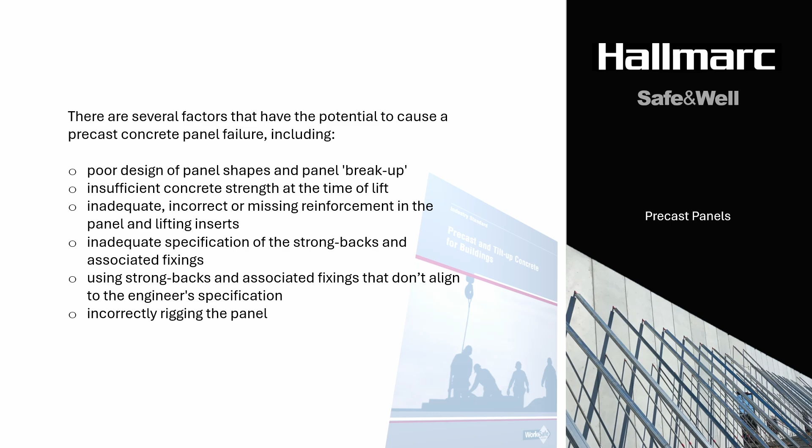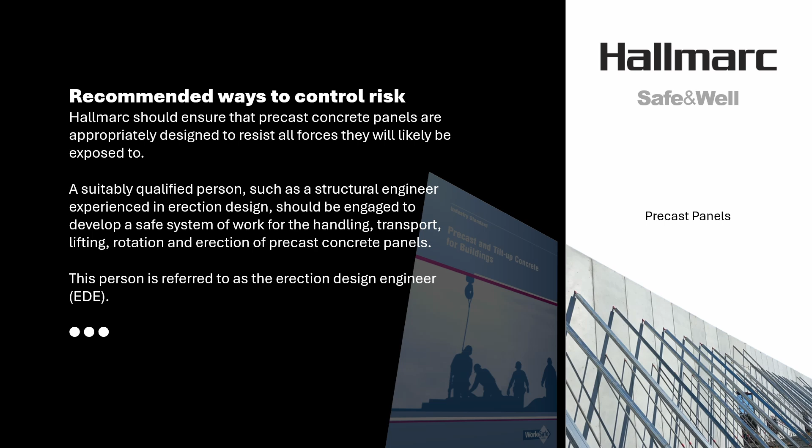Recommended ways to control risk. Hallmarc should ensure that all precast concrete panels are appropriately designed to resist all forces they will likely be exposed to. A suitably qualified person, such as a structural engineer experienced in erection design, should be engaged to develop a safe system of work for the handling, transport, lifting, rotation and erection of precast concrete panels. This person is referred to as the erection design engineer, or EDE.

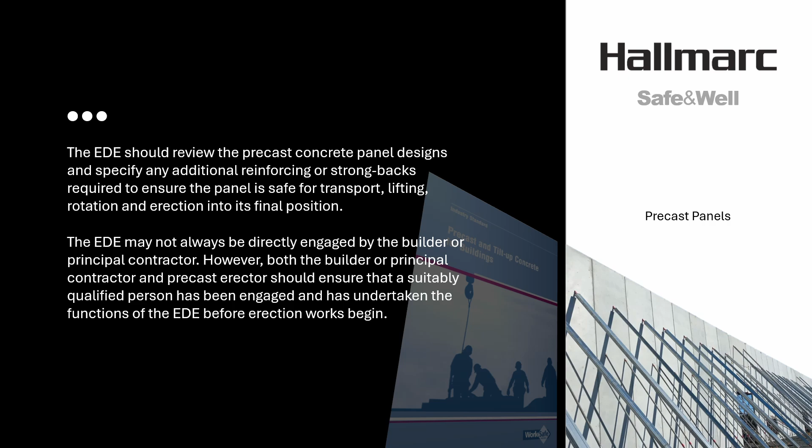The EDE should review the precast concrete panel designs and specify any additional reinforcing or strongbacks required to ensure the panel is safe for transport, lifting, rotation and erection into its final position. The EDE may not always be directly engaged by the builder or principal contractor. However, both the builder or principal contractor and precast erector should ensure that a suitably qualified person has been engaged and has undertaken the functions of the EDE before erection works begin.

The following critically important factors should be addressed to reduce the risk of a precast concrete panel failing during rotation. Please note that this is a non-exhaustive list. Prior to panel manufacture, the project structural engineers and builder should consult with the erection design engineer and precast panel manufacturer to ensure that the precast panel breakup design achieves panel shapes that are robust and can be handled safely, where possible without the need for strongbacks and additional reinforcement.

The EDE should carefully consider all forces that the panel will be exposed to during lifting, rotation and placement, and review the design of the panel to determine whether additional reinforcement or strongbacks are required to ensure that it can be handled safely, especially where the panel has cutouts or penetrations. And provide the precast manufacturer with marked-up structural or shop drawings that accurately and clearly show the necessary lifting and bracing insert locations and any additional reinforcement or strongbacks required.

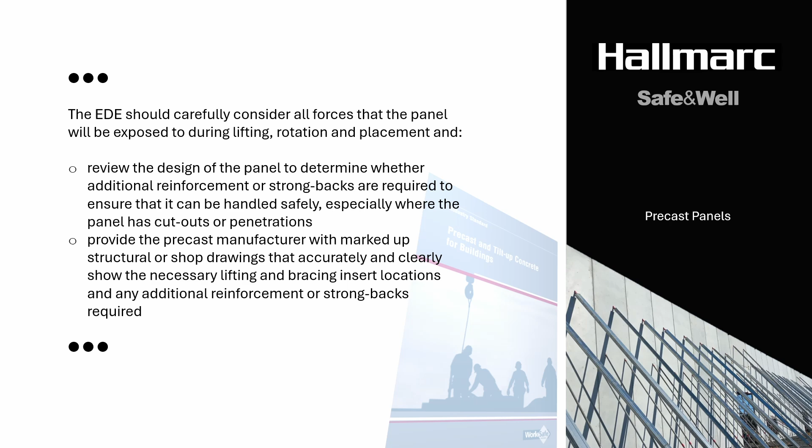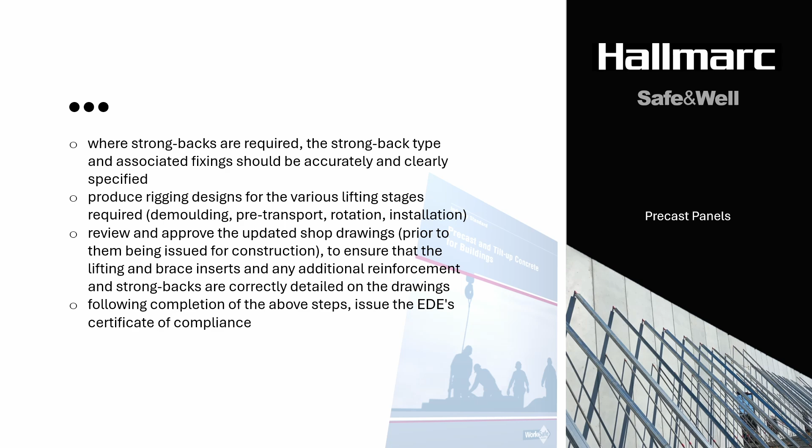Where strongbacks are required, the strongback type and associated fixings should be accurately and clearly specified. Produce rigging designs for the various lifting stages required, such as demolding, pre-transport, rotation, and installation. Review and approve the updated shop drawings prior to them being issued for construction to ensure that the lifting and brace inserts and any additional reinforcement and strongbacks are correctly detailed on the drawings. Following completion of the above steps, issue the EDE Certificate of Compliance.

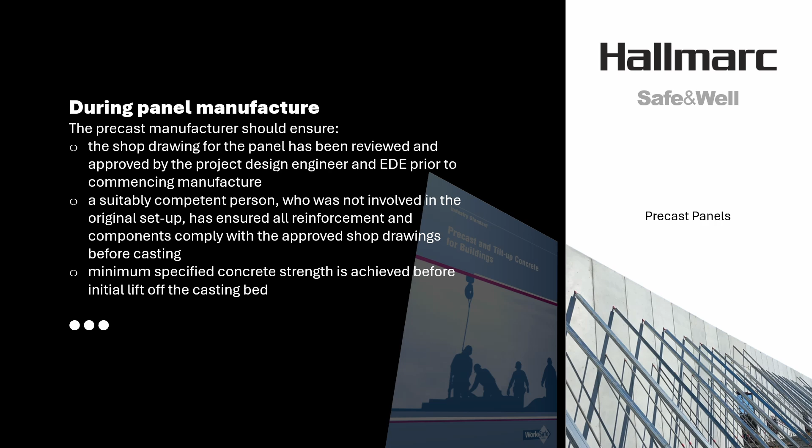During panel manufacture, the precast manufacturer should ensure the shop drawing for the panel has been reviewed and approved by the project design engineer and EDE prior to commencing manufacture. A suitably competent person, who was not involved in the original setup, has ensured all reinforcement and components comply with the approved shop drawings before casting, and that the minimum specified concrete strength is achieved before the initial lift off the casting bed. All strongbacks are installed as per the EDE specification prior to lifting or transport.

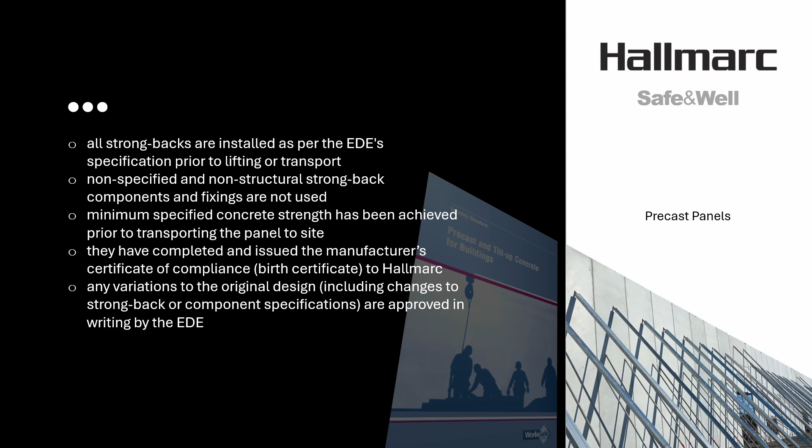Non-specified and non-structural strongback components and fixings are not used. Minimum specified concrete strength has been achieved prior to transporting the panel to site. They have completed and issued the manufacturer's certificate of compliance to Hallmarc. And any variations to the original design, including changes to strongback or component specifications, are approved in writing by the EDE.

Prior to lifting the panel on site. When the precast concrete panel arrives at site, but prior to lifting, an appropriately ticketed rigger should inspect the panel to ensure it aligns with the shop drawing, for example, dimensions, cast-in plates, inserts and ferrule locations all match the drawing, and that the panel and components are free from damage. Confirm the lifting inserts match the shop drawing specification and are free from damage. And confirm the concrete adjacent to the lifting inserts is in good condition and free from significant cracking, honeycombing or damage. If in doubt, seek advice from the EDE.

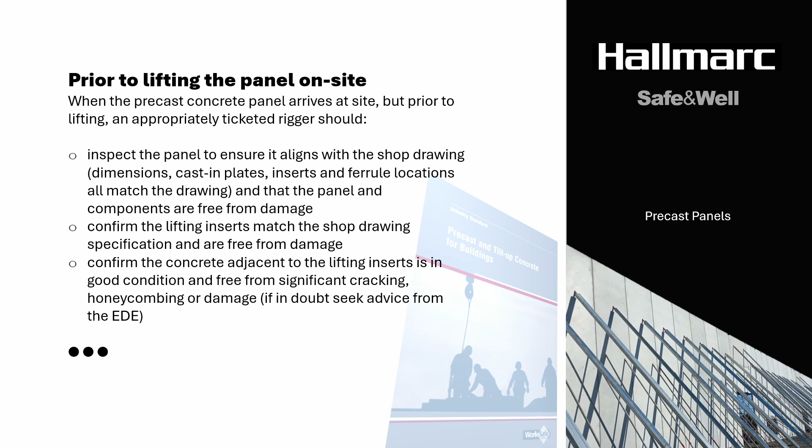Ensure strongbacks are all in place and as per the shop drawing specification. Look for type, size, location, orientation and fixings. Review the birth certificate for the panel to confirm the casting date. Confirm the lifting clutches are compatible with the lifting inserts, and inspect all rigging gear prior to use. Ensure the panel is rigged in accordance with the relevant rigging design, being sure to use the correct lifting inserts where there are multiple inserts present. And stop the lift and seek advice from the EDE if any of the above safety critical information is missing or if there are any issues identified during inspection of the panel.

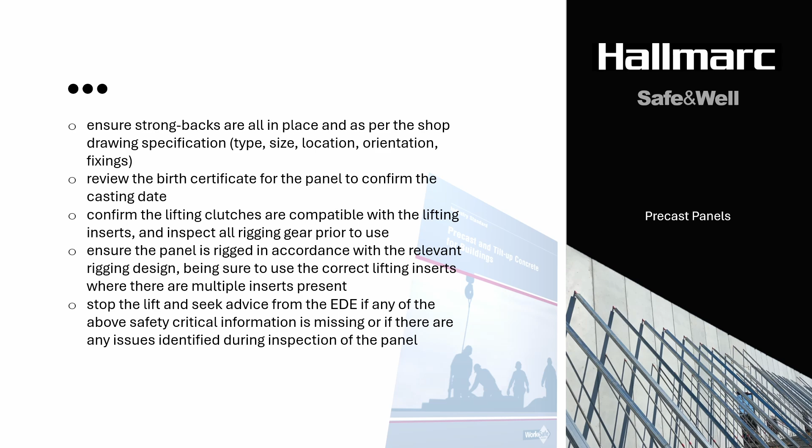Delivery. Look out for these potential issues. Defective trucks or A-frames, such as damage to the truck or trailer, and fall risks not being controlled. Inadequate load restraints on A-frames and panels, for example, panel lashing sequence, and over-center dogs or twitches being used.

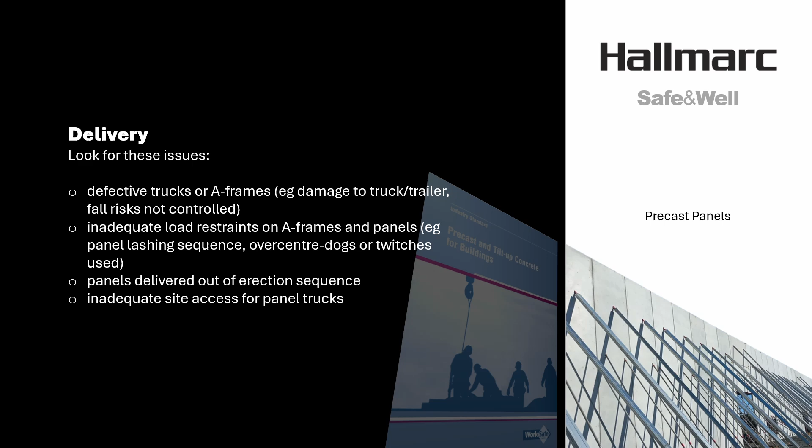Panels delivered out of erection sequence. And inadequate site access for panel trucks. Is craneage sufficient for the erection? Selection of cranes should be in accordance with Australian Standard 2550 and consider capacity required at working radius when lifting. Sufficient craneage to safely rotate panels.

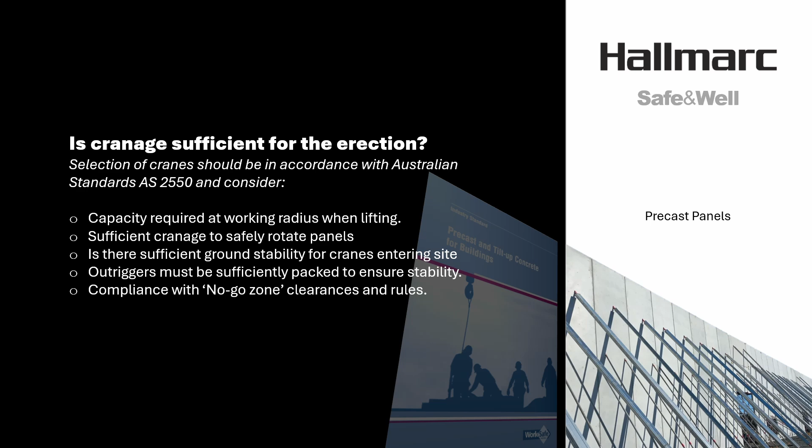Is there sufficient ground stability for cranes entering site? Are outriggers sufficiently packed to ensure stability and compliance with no-go zone clearances and rules? Panel erection. Has the necessary preparation been completed prior to erection? A risk assessment should deal with all aspects of preparation to ensure the access and erection area is safe.

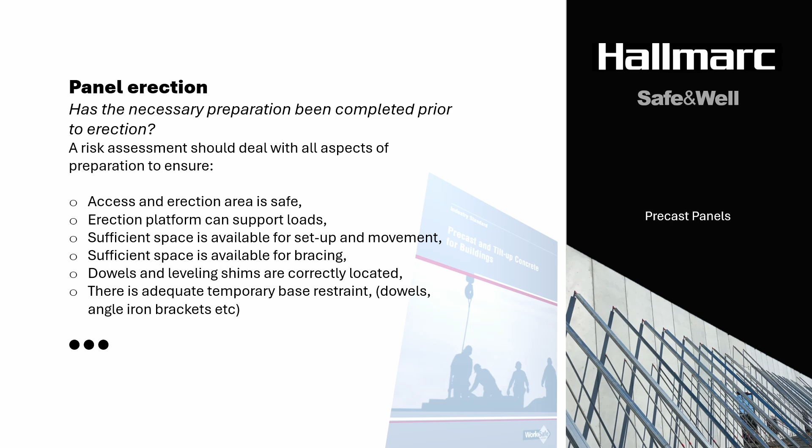The erection platform can support loads. Sufficient space is available for setup and movement. Sufficient space is available for bracing. Dowels and leveling shims are correctly located. There is adequate temporary base restraint, such as dowels or angle iron brackets. Panel and brace footing has attained specified strength.

Rigging equipment is in serviceable condition. Check for clutches proof tested every 6 months. Slings, chains and sheaves are free from damage and excessive wear. Lifting and spreader beams are marked with working load limits. Lifting inserts are in their correct location, as specified on shop drawings, and recesses cleaned. And only the minimum number of people are working in the erection area.

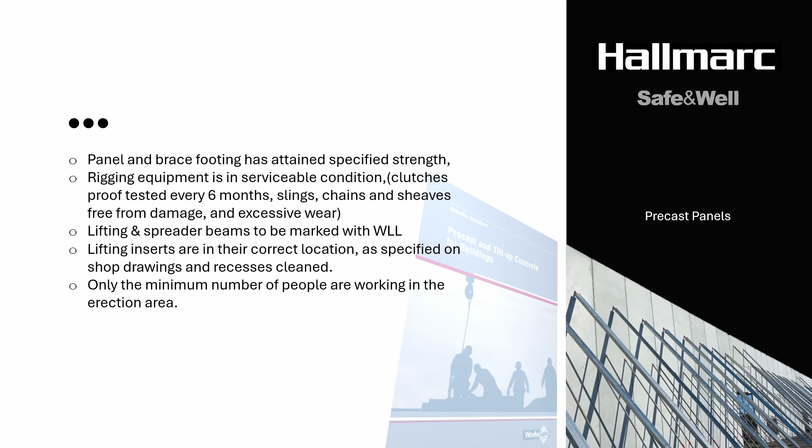Are the members of the erection crew properly trained and certified? The person responsible for direction and coordination must hold a certificate of competency in either intermediate rigging or advanced rigging classes. The person responsible for the coordination of the panel erection must also have received training based on the industry standard. The crane operator must hold a certificate of competency appropriate for the type and size of crane being used. The crew should include at least one additional certified rigger.

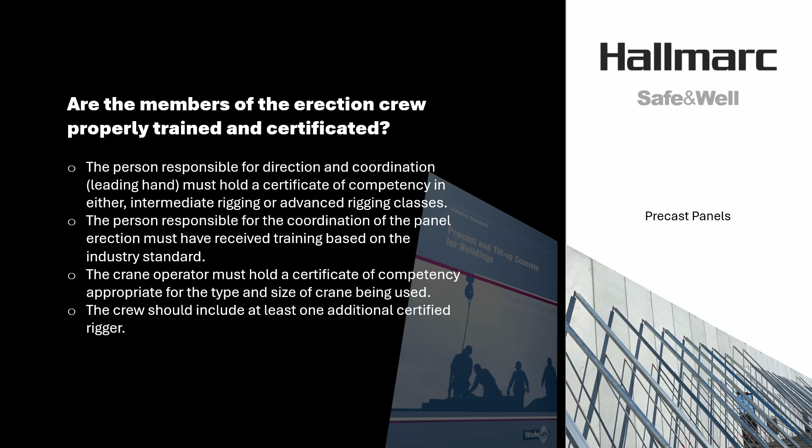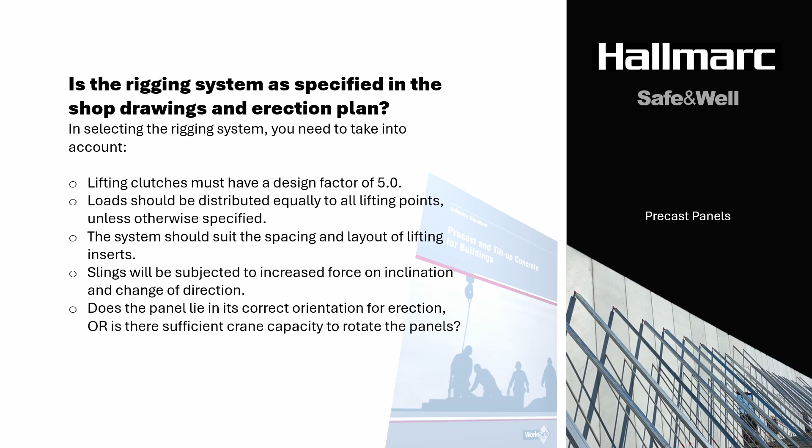Is the rigging system as specified in the shop drawings and erection plan? In selecting the rigging system, you need to take into account: lifting clutches must have a design factor of 5.0. Loads should be distributed equally to all lifting points, unless otherwise specified. The system should suit the spacing and layout of lifting inserts. Slings will be subjected to increased force on inclination and change of direction. And does the panel lie in its correct orientation for erection, or is there sufficient crane capacity to rotate the panels?

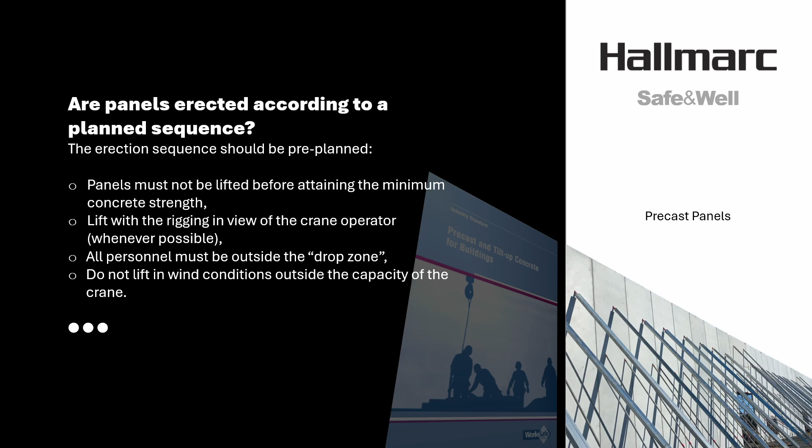Are panels erected according to a planned sequence? The erection sequence should be pre-planned. Panels must not be lifted before attaining the minimum concrete strength. Lift with the rigging in view of the crane operator, whenever possible. All personnel must be outside the drop zone. Do not lift in wind conditions outside the capacity of the crane.

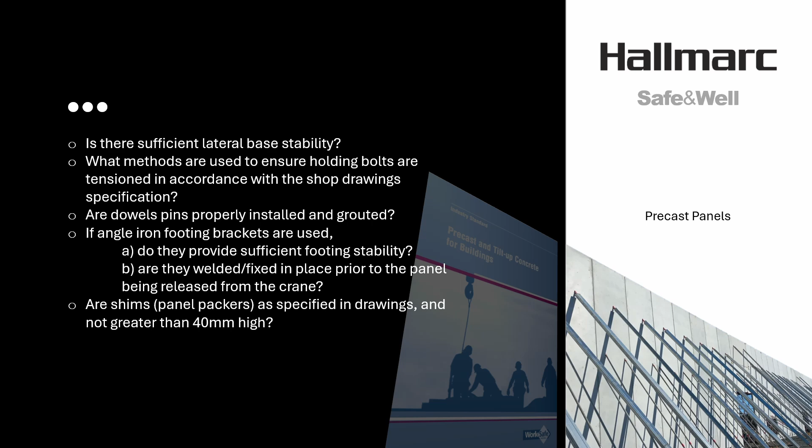Is there sufficient lateral base stability? What methods are used to ensure holding bolts are tensioned in accordance with the shop drawing specification? Are dowel pins properly installed and grouted? If angle iron footing brackets are used, then A, do they provide sufficient footing stability? And B, are they welded or fixed in place prior to the panel being released from the crane? Are shims specified in drawings, and not greater than 40 mm high?

Where temporary bracing is required, is it able to resist all loads? The panel must be held firmly and safely by the crane while all braces are attached. Braces must have identification plates and load capacity marked. Working load limit must be in accordance with Australian Standard 3850. A minimum of 2 braces must be used for each panel. Bracing anchor bolt size and length must be as specified on the shop drawings. And are knee bracings required?

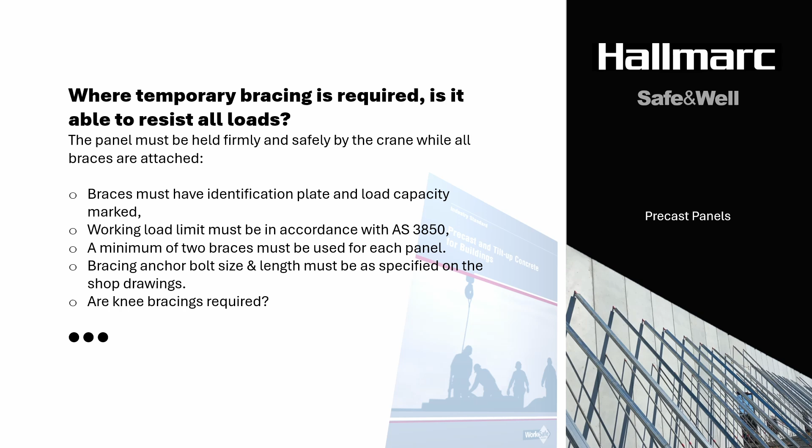Braces should, where possible, be located at 2/3 of the height of the panel. Temporary concrete pad footings for bracing must be designed to support brace footings. Footing design documentation must show concrete strength at installation, additional reinforcement and dimensions. If a screw-in steel footing plate system is used, soil testing results must be kept with shop drawings and erection plan.

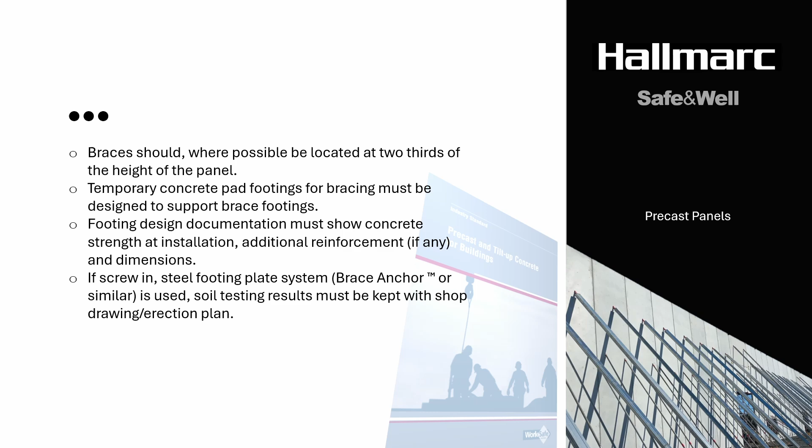Ongoing maintenance of bracing components and final removal of bracing. It is Hallmarc's responsibility to ensure that braces, bracing bolts and pins are checked at regular intervals for required capacity and/or damage. This is contained in the weekly site inspection. Brace pins are secured and locked, and can only be removed by using a tool. And braces are not to be removed, under any circumstance, prior to final written instruction from the erection design engineer or project design engineer.

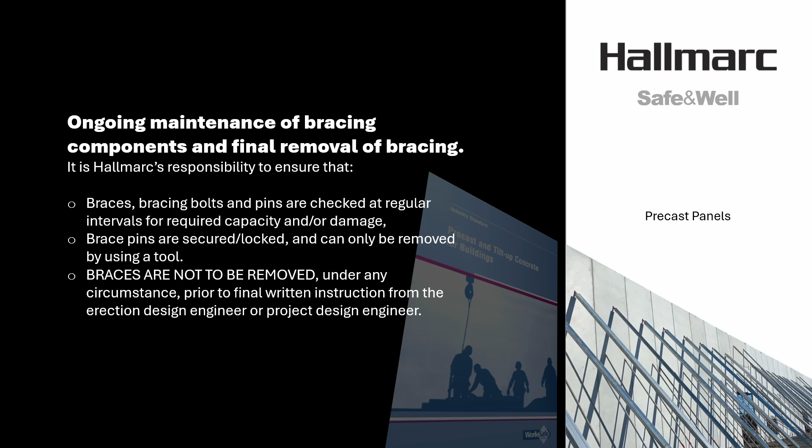A precast panel installation checklist is found in Build Pass. This checklist should be completed for each day of panel lifting on site.